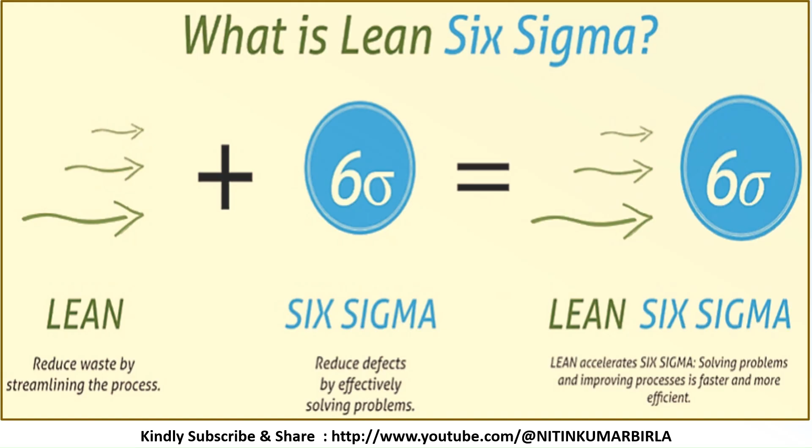Because every customer may not buy your product every day, but the customer who purchased it today should speak good about it for years to come, so that it will trigger another customer to buy your products. And that only comes when you are ensuring right quality, consistent quality in the hands of your customer.

You have a very simple picture in front of you, but it is a very critical picture, okay? And why is it critical? It looks simple, but it's critical. The organization, the product comes to your hand. A piece of bread, when it comes to your plate - some farmer, some part of the world had the courage to grow one grain of wheat. See the journey of a slice of bread, a piece of bread.

Similarly, the cloth what you are wearing right now - somewhere raw material has been produced. If it is cotton, it's from the agriculture land. Silk, again from the agriculture land. If it is synthetic, it's still generated from some downstream companies, petrochemical plants, synthetic fibers.

That fiber comes to a manufacturing garment industry, where garment industry makes a cloth out of it from that thread. They dye it to different colors, they make a cloth. From that cloth, they make the different garments - shirt, pant, jeans, all garments. Then they are packed and then they are sold in the market.

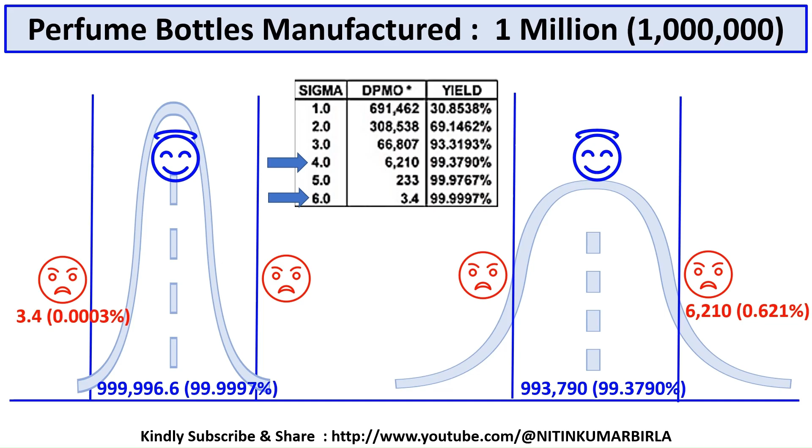But whether you are going for certification or not, Lean Six Sigma is a philosophy of handling wastages, making a basic understanding on the subject. You need to study your detailed curriculum when you are going for a certification program. But this is just building a basic foundation for your clarity and understanding. So respect your curriculum for whatever certification program you are doing. My sessions are not assisting you for any certification program. You are going to get a small write-up, so don't worry.

I'm just going to read what the Six Sigma approach is now - the facts. Processes are interconnected; nobody works in isolation. Variations exist in all processes, whose characteristics can be measured, analyzed, controlled, and improved. Yes, there will be variations.

When you do a crop, a farmer cannot guarantee that the wheat size will be same as it was in the previous crop. This variation will exist due to temperature conditions, pressure conditions, ambient conditions.

But what you should do is measure these variations, analyze them and try to control them. Suppose the mine from where you are taking the ore is changing its characteristics, things are interconnected and there will be variations. There is no foolproof system which says there will not be any change, that everything will be perfect from A to Z. No.

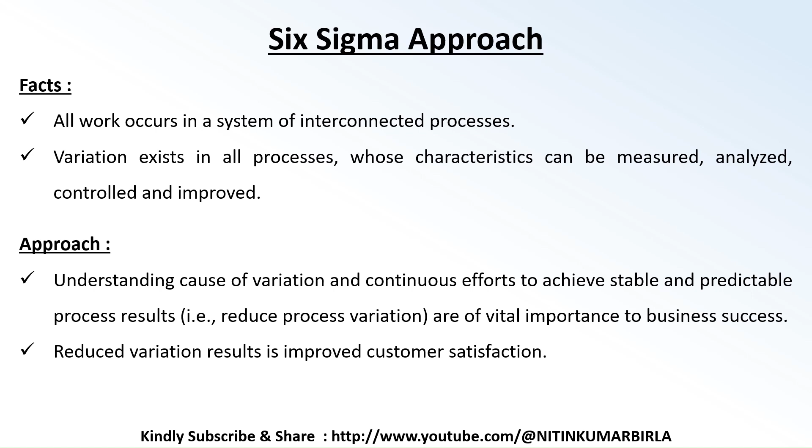This particular machine is giving me a problem, try to fix that machine. Either that machine is very old, so try to deal with that - try to bring a new one if you want, or try to improvise that product or that machine.

Your job is done. So by this process, when you are doing it, you had a high variation. So from there, after doing this cycle - define, measure, analyze, improve, control - your defects are reduced. Now you have come to a safer zone, your product defects have reduced. So this is how the scientific approach works.

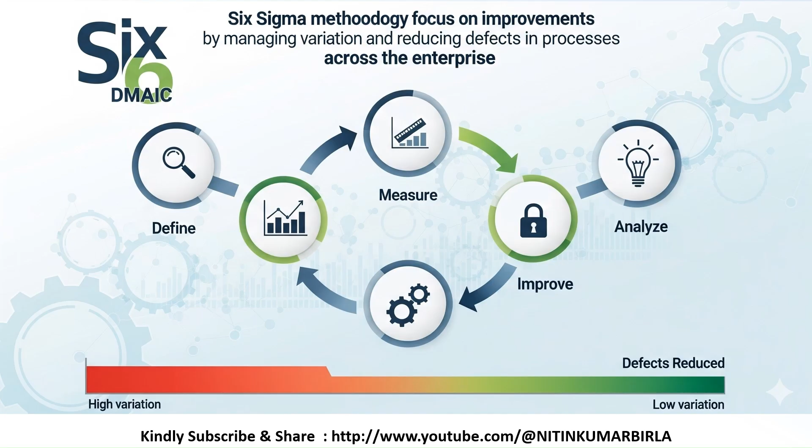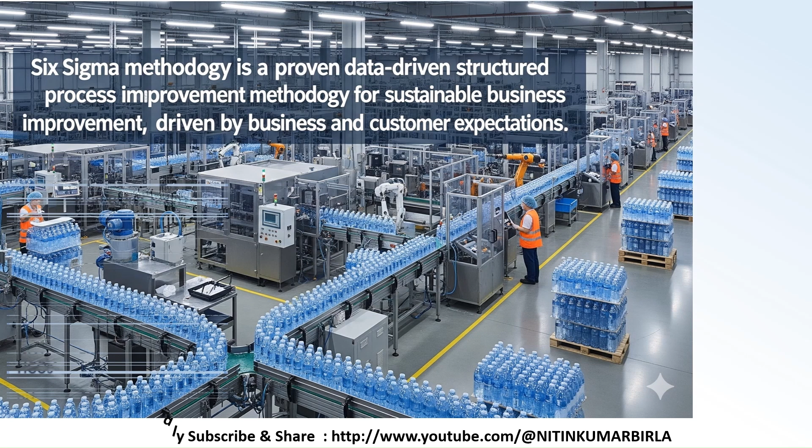And remember one point, this is a data-driven process. You are handling a lot of data here. Qualitative analysis works very good for a longer duration, but when it comes to reducing defects to that level - 3.4 defects per million in Six Sigma - it is more numerical driven, data driven, feedback driven system.

So, examples from all industries today so that you can be clear what subject we are talking about. Six Sigma methodology is a proven, data-driven, structured process improvement methodology for sustainable business improvement, driven by business and customer expectations.

One very simple example: you know that you are putting a label on the bottle when you pick it up, correct? So you have a label here. In this label, I just put a picture to show you - TDS 180, calcium plus 36, magnesium 4.9, and so on, pH 7.5 - so it's alkaline in nature.

What is our idea behind this? The bottling plant has to ensure that these quality parameters, which are certified from the respective authorities, are managed - these quality parameters, composition in the water. If you go beyond this, you are not only a defaulter to your clients, customers or consumers, you are even a defaulter to the government authorities.

So it could have a bigger impact on your factory and manufacturing - they may even seal your production. So why go to that extreme condition? Better to keep monitoring these parameters, and that's why these parameters are monitored on a regular basis.

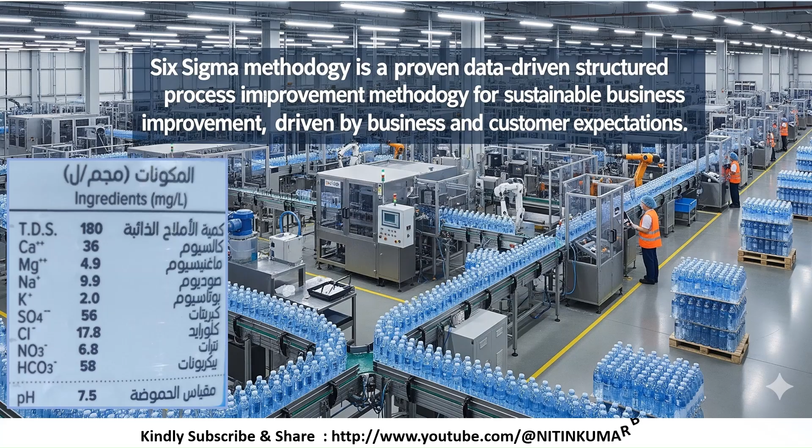Same example from the cement industry. Six Sigma measures process variation that causes defects, unacceptable deviations from the mean or target. Getting my point? Generally, the cement industries are located somewhere in the hills.

They are located near the raw material, limestone, in general, because raw material transportation is a big headache, and it is better to remain close to that raw material. Since raw material comes in different shapes, transportation logistics could be highlighted well by someone from the cement industry. I'm not from the industry, but I know it.

So the point here is, sometimes you are manufacturing 3-4 grades of cement, but over a period of time your raw material is changing its quality and pattern, which comes from the limestone mountains when you extract it. So what you do is decide to discontinue 1 or 2 grades.

Even 20.1 kg, 100 grams extra, the customer will be happy. But you will be at a loss, correct? And you are making this loss continuously, just because of a small error in your process.

Similarly, the other way around, if your packaging is going unnoticed to 19 kg and 900 grams, 100 grams less, immediately you'll get a complaint from the market that so-and-so brand of cement is giving the quantity of cement less than defined.

Either way, in the modern era, these things are very strictly monitored now. But just to make you understand the concept, I'm giving this kind of example. Otherwise, nowadays they will sue you if you are not giving the defined quantity - that's a different case altogether. But what I'm trying to make a point here is that these checks and balances have come so well in place now, whether in the name of Six Sigma or other quality management systems, that such kind of errors do not happen.

So that's why it proves that we need this kind of quality checks and balances in our industry. We have done good.

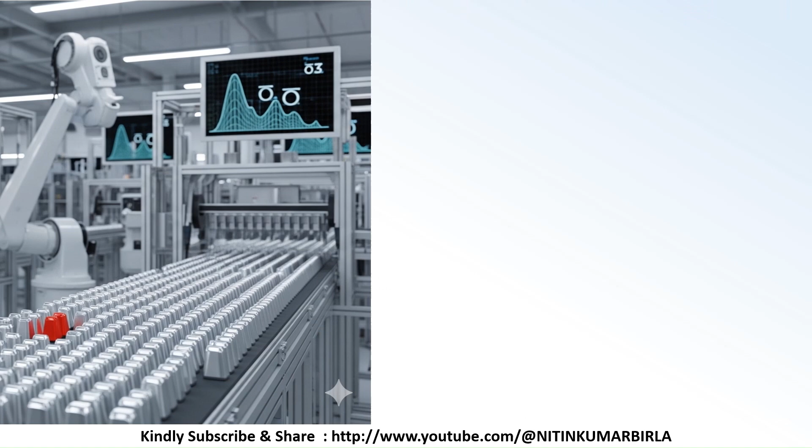I am 6 Sigma and I have only 3 defects per million in my box - 3.4 defects per million. I'm very happy. It's fine.

It is not only restricted to defect control. Yes, that is a primary thing, to reduce the defect. But is your product able to meet continuous customer satisfaction?

I'm triggering two important factors here. Be with me at this point, because I'm going to change my position slightly. That 3.4 million defects, fine, 3.4 defects per million. But because of this, my product cost is going high. It is making a burden on my customer's pocket also.

So I am bringing a concept on the subject that before you go to the Six Sigma level, to achieve that much accuracy of production with minimal defects will require a lot of monitoring. Probably your investment cost of manufacturing will be very high, and probably your product cost will be very high.